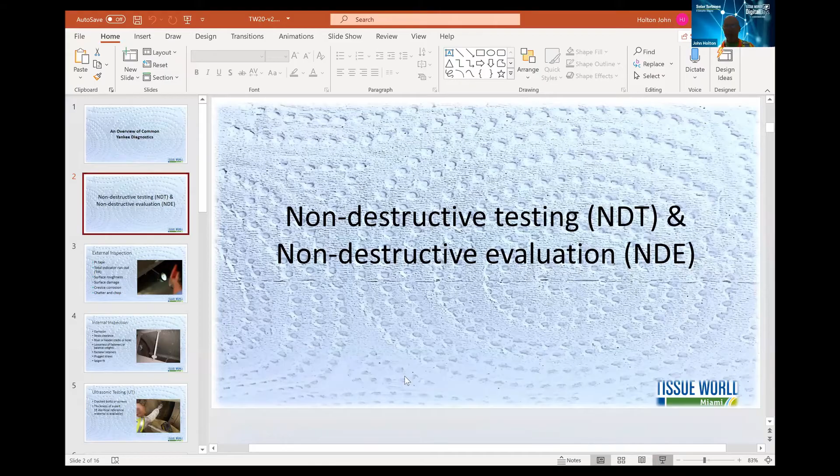Hello, everybody. It seems we lost John. John, are you here? I just got back. Okay, so we continue with the original schedule. Okay, yeah, thanks. Sorry about that. It's technical difficulties here, and well, let's just see if I can share my screen and we'll get going from there. Okay, has everybody got it? Okay, so we have started.

All right, everybody. Today we're going to have 5 sessions, and at the end we're going to have 5 questions and answers of real life problems. And at the very end, we're going to have 8 possible voting opportunities where the audience chooses the one and only option. The boss says you have no money, you can choose one option and you better get it right. And then the audience will vote on which of those 8 options would be the best solution if you only have one chance to solve the problem.

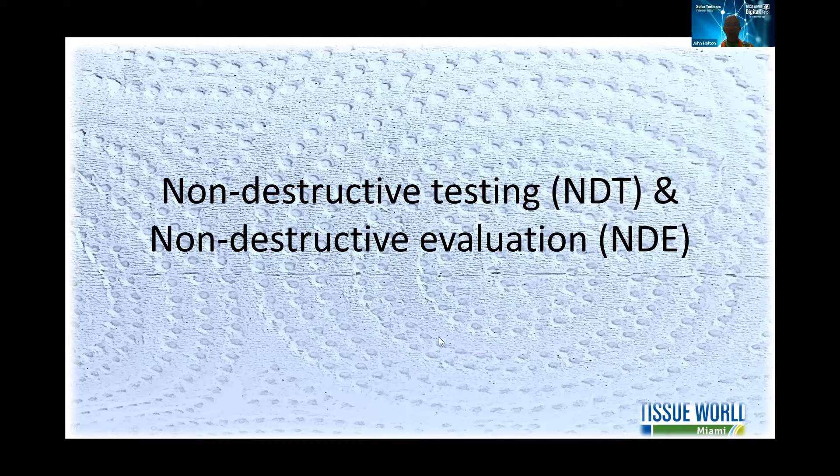So I'm going to quickly go over several typical diagnostics techniques. Those techniques will be coupled in the end in order to give you 8 options, 4 from our speakers, and then 4 from the discussion I'm about to have. So let's get started. I'm going to talk just about common forms of non-destructive testing. So very common inspections that we all do, and you may want to take notes about what they all are, because there's a lot in here.

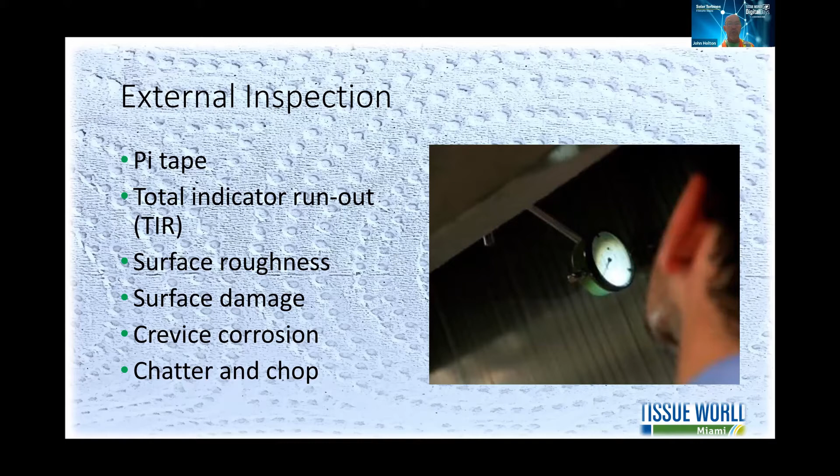The external inspection, that would include pi taping, total indicator runout, or TIR, surface roughnesses, mapping of surface damages, inspections for crevice corrosion, chatter, or chop. The next common inspection is an internal inspection, where you might check for corrosion, straw clearances, riser or header cracks or holes, looseness of fasteners or balance weights, fastener retainers, plugged straws, or spigot fit.

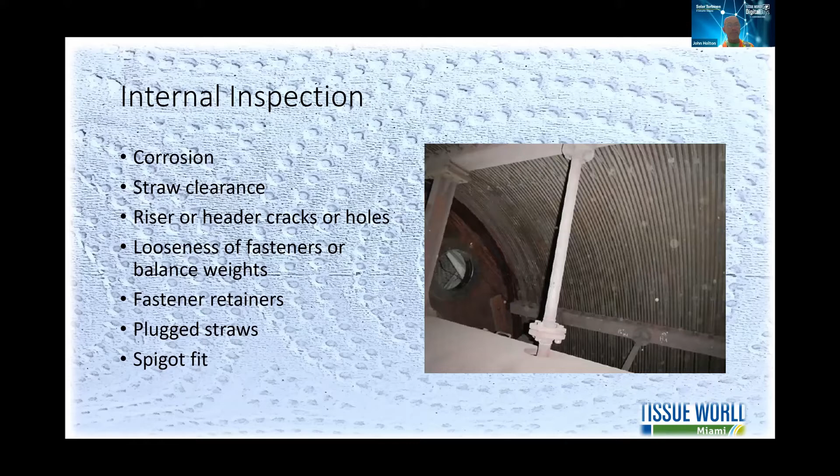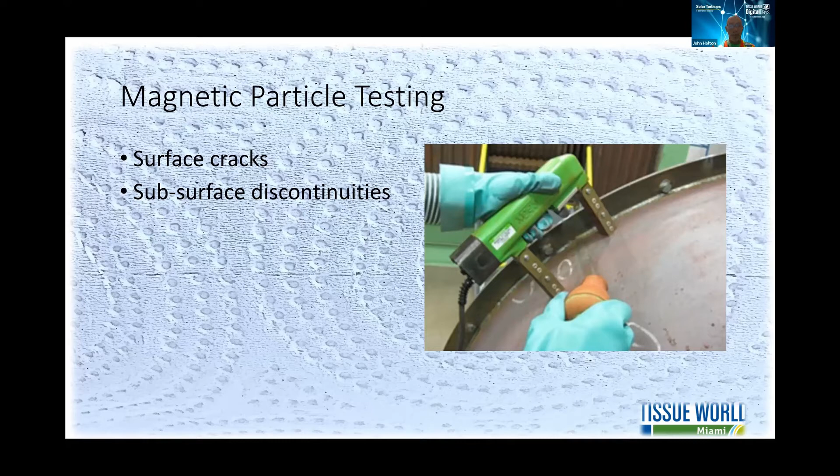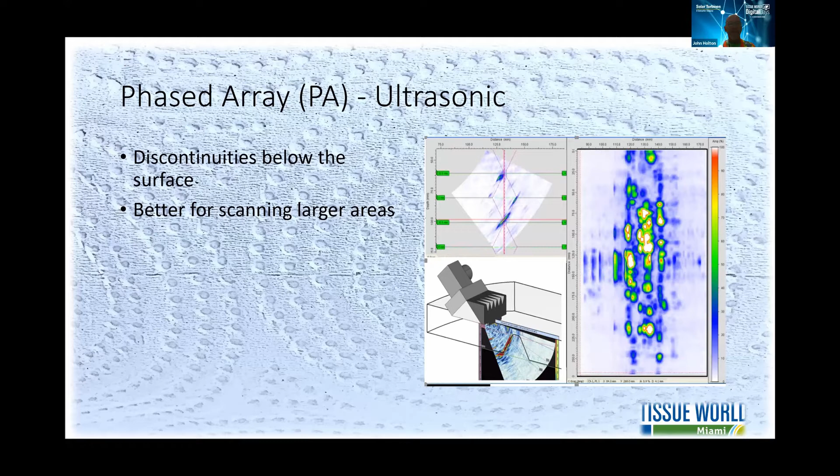Ultrasonic testing, something very common, normally every 5 years, for cracked bolts or screws, thickness of the part, if the identical reference material is available. Magnetic particle testing, where you would look for surface cracks or subsurface discontinuities. For steel Yankee dryers, a common approach would be phased array ultrasonic, which can look for discontinuities below the surface. This technique is better for scanning larger areas. If you had to scan a whole Yankee dryer, for instance, this would be the tool used. And then we have time of flight diffraction. It also checks for discontinuities below the surface, and it's better for determining the size of the discontinuity.

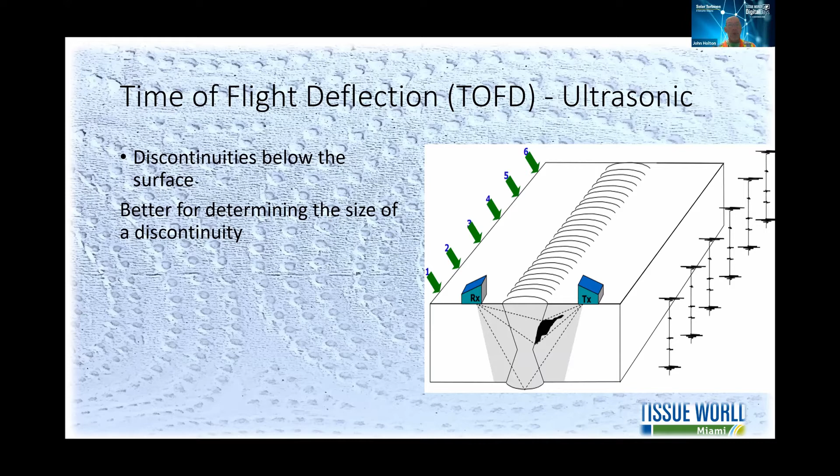Okay, pressure roll load test. This test verifies the nip load, if you're at 90 kilonewtons per meter or not. The curve may say that. This test will prove whether you're at full load. It verifies zero load, how much pressure it takes just to lift the roll. It determines if a load skew exists, and it develops a load curve from accurate and repeatable measurements versus a calculation.

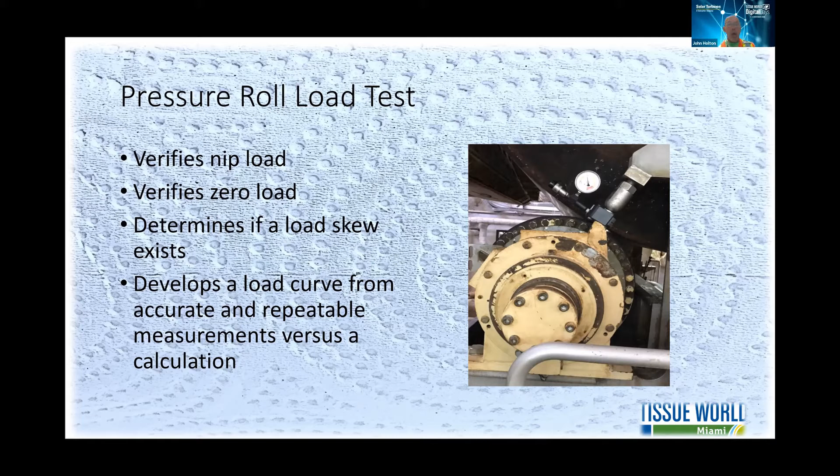Operational profiling is also a way to optimize the differential pressure or blow-through velocity. You can see here in this photo where the headers in this Yankee dryer are clearly visible. This may be an opportunity to optimize the differential pressure or blow-through.

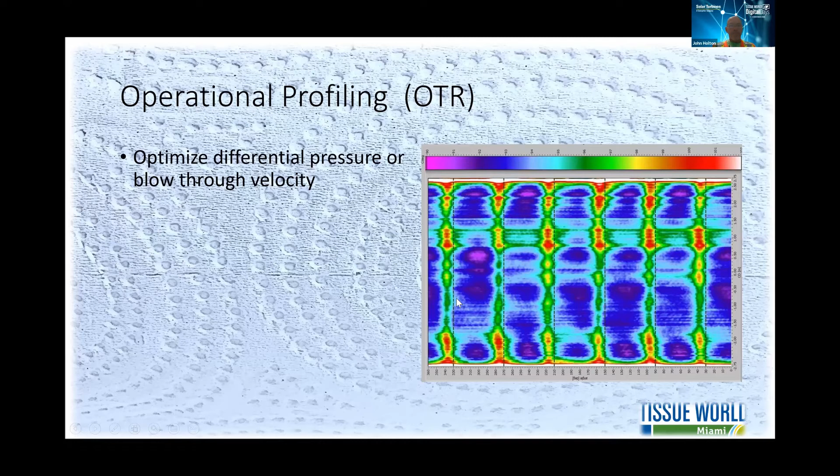Again, this is another operational profile commonly used, and this is for crown optimization by comparing the operating profile to the grinding profile to crown specification. So a good tool for getting the crowns absolutely right. It can also tell you if there's any wear on the surface, because we don't know for sure sometimes if it's operating conditions or wear conditions. So by measuring under grinding conditions, we can separate the two and determine exactly how much wear the Yankee dryer has.

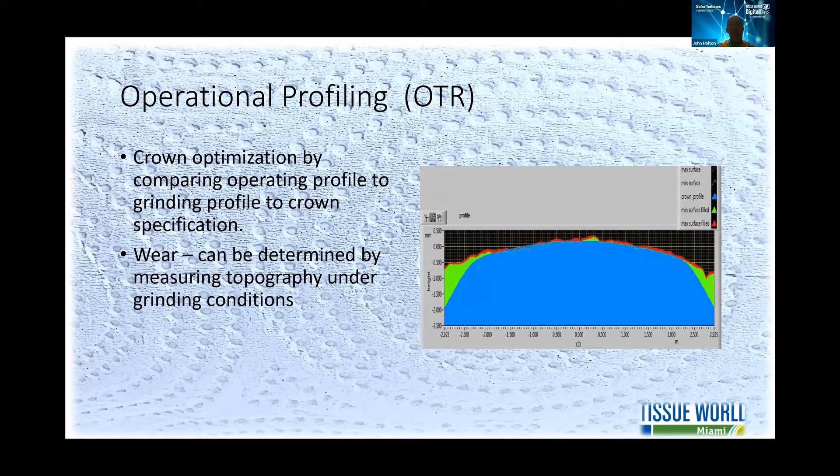And then high-speed infrared imaging or line scanning. This will check for very small variations on the shell surface, such as a through shell leak. And sometimes through shell leaks occur during operation, but you shut it down and you can't find it. This is a tool that would find a through shell leak. It can also, as the OTR, determine if there's internal condensate system problems. Or it can also fool you because it can be a reflection of a poor profile of a sheet coming to the Yankee dryer.

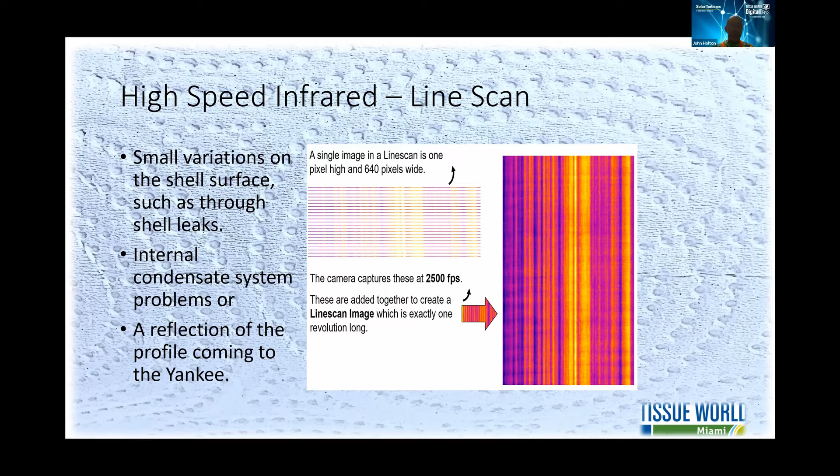Each pixel in the high-speed line scanning can be used to develop an FFT analysis. So you can use the frequencies to determine any influence upstream or internal issues. So it could be a condensate system inside the Yankee. However, if the FFT shows a longer or a lower frequency, it might be the felt. And the line scanning can also pick up seams in felts, for example.

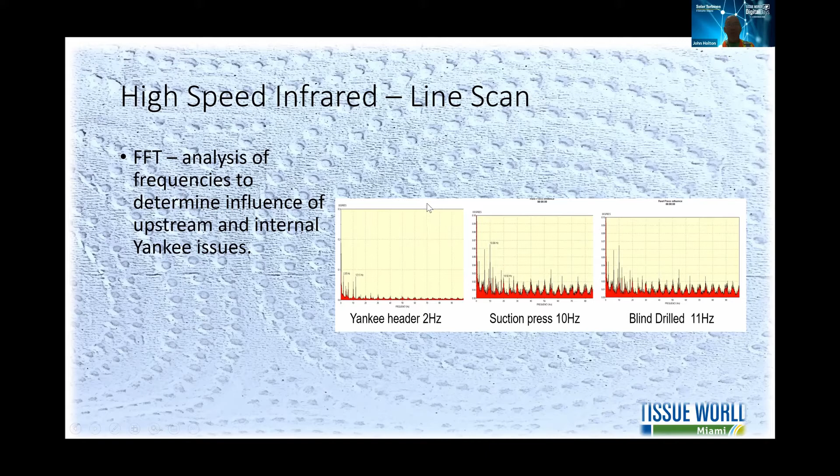In summary, exterior inspections can be on steel or cast iron dryers. The same with interior inspections. UT or MPI, magnetic particle, can be used on both. Phased array and time of flight are typically an application for steel dryers to inspect the welds, etc.

Operational profiling or on-the-run profiling looks for internal issues in the Yankee or upstream issues.

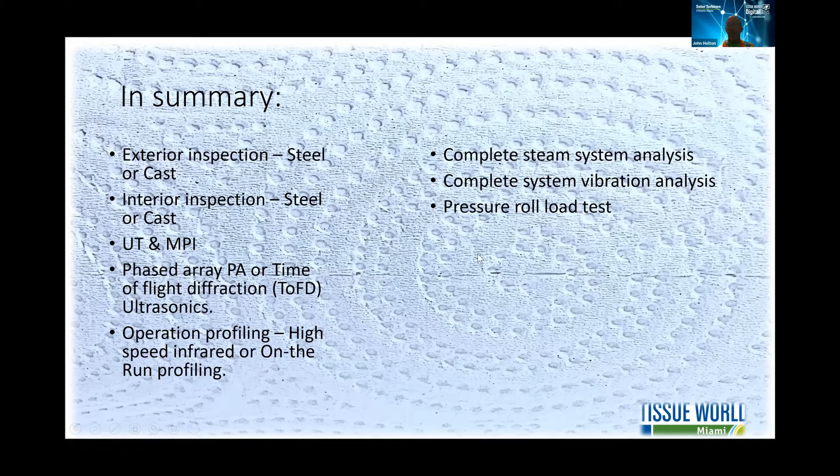And I can't see the rest of mine.

Okay. Pressure roll load test, and then these two will be steam systems, and vibration will be spoken to by later participants. And so that concludes my presentation.

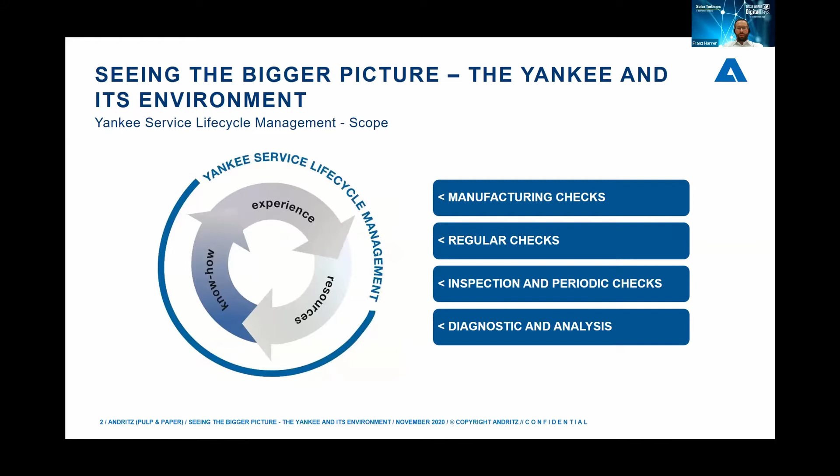It's good. Perfect. Today I'm going to talk about Yankee dryer lifecycle management, the inspections and periodic checks. In my presentation, I'd like to cover manufacturing checks, so all the inspections we're doing during manufacturing, the regular checks, which can be done by the operators themselves, inspections and periodic checks, which are done by service specialists, and diagnostic and analysis methods, but most of them you already covered in your presentation.

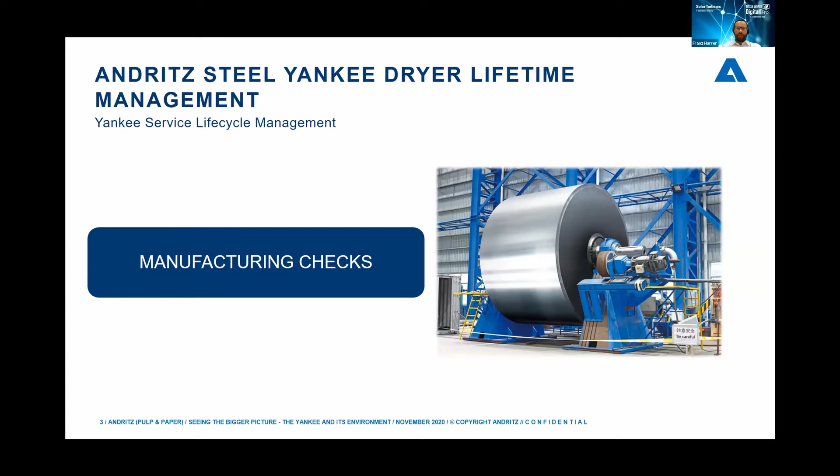The manufacturing of pressure vessels, respectively the Yankee dryer, is constrained to international pressure vessel standards like the AD 2000 or the ASME or GB 150, but all these regulations and acceptance criteria are designed for static pressure vessels, so it's up to the Yankee manufacturer to develop its own more strict acceptance criteria and testing procedures to handle dynamically loaded parts as the Yankees are.

As John already mentioned before, the most common tests for steel Yankees, where the test focus is on the welding seams, are the magnetic particle test, ultrasonic test, time of flight diffraction, and phased array. We really recommend 100% testing of all the welding seams in longitudinal and circumferential direction. And we recommend MT and UT testing before and after the heat treatment to make sure that during the stress annealing process no indications or cracks appear.

The final release and certification of a pressure vessel is always done by an external accredited and authorized authority. They observe the manufacturing process, check all the manufacturing and quality documentation, and perform a final water pressure test or acoustic emission test. The water pressure test is a safe test procedure for checking pressure vessels, as there is no energy stored in water compared to steam or air. Acoustic emission test is a very seldom chosen option for Yankees in manufacturing.

Before the Yankee leaves the manufacturing location, a final quality check will be done, containing a detailed check of the metallizing, visual, and quality parameters. As well, internally, the siphon system, the condensate removal system, will be checked. All tolerances and dimensions will be checked before the Yankee is packed according to specification and shipped to the customer.

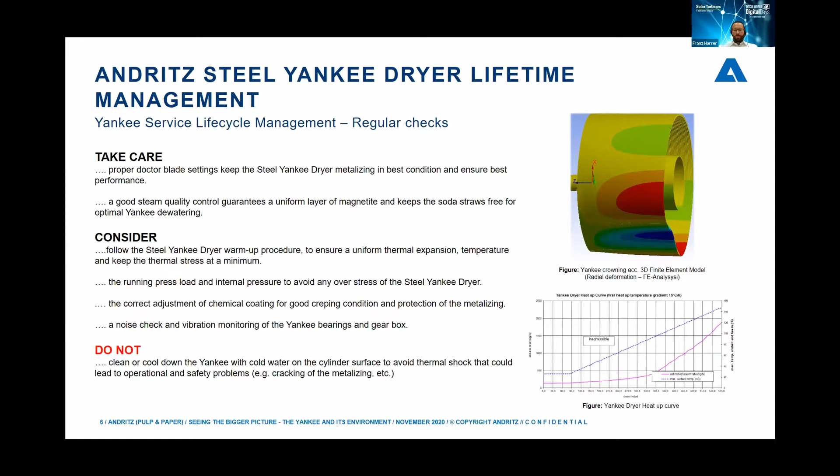Now coming to the inspection and periodic checks, which is recommended by all Yankee suppliers and the TAPPI organization. Here as well, the focus is the inspection of the metallizing: a detailed visual inspection of the Yankee surface, followed by microscopy inspection, roughness measurement, run-out measurement, measurement of the remaining layer thickness, and so on are the main tasks of the inspection of the metallizing.

Inside the Yankee, the soda straw system and the condensate removal system have to be checked in detail, but here take care: only authorized and trained personnel are allowed to enter the Yankee, and all safety measures and procedures have to be taken into consideration. If any soda straws are blocked, we recommend to replace them by spare parts. If no spares are available, you can clean them with a drilling tool and support this as well with chemical acidic baths where you put the soda straws in.

And in general, if you enter the Yankee, check if there are any loose parts around, if there are any cracks or whatever. If you find some loose parts, it has to be investigated where they are coming from. They have to be reinstalled and secured in a way that they never get loose again.

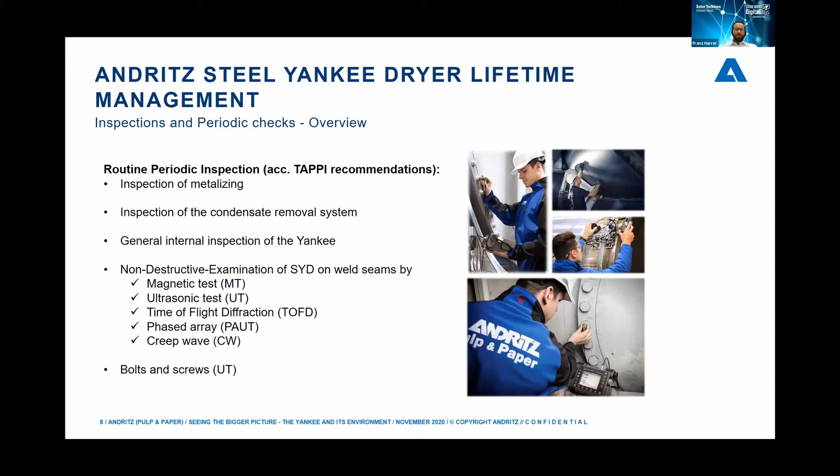As the focus here is on welded steel Yankee dryers, it's strongly recommended, and in some countries it's mandatory, to do non-destructive examinations of the welding seams on a regular basis. Here you can use magnetic test, ultrasonic test, time of flight diffraction, phased array, creeping wave, and so on, just to check if there's any indication since the last inspection. All bolts and screw connections have to be checked on a regular basis, and especially on the big parts like the head-to-shell connection, UT testing can be performed to check if there's any crack in the screw, and then it has to be replaced.

Now at the end of my presentation, I would like to talk about diagnostics and analysis. The on-the-run measurement is state-of-the-art technology for advanced Yankee dryer inspections. There you will get information about the geometry of the Yankee, how it is performing. You get a temperature profile in machine and cross machine direction. This gives you information about dewatering or the performance of the condensate system. And you can as well discover overheating of the edges. Additionally, laser measurement to check the crown and the wear is possible.

Visual checks are the most important things and should be done regularly by the operators themselves. And I really recommend to do audits on a regular basis with the machine suppliers, chemical suppliers, blade suppliers to optimize the conditions around the Yankee, especially in the creping area. This saves the Yankee surface, keeps the metallizing in a good condition, can increase the blade lifetime, and chemicals can be saved as well.

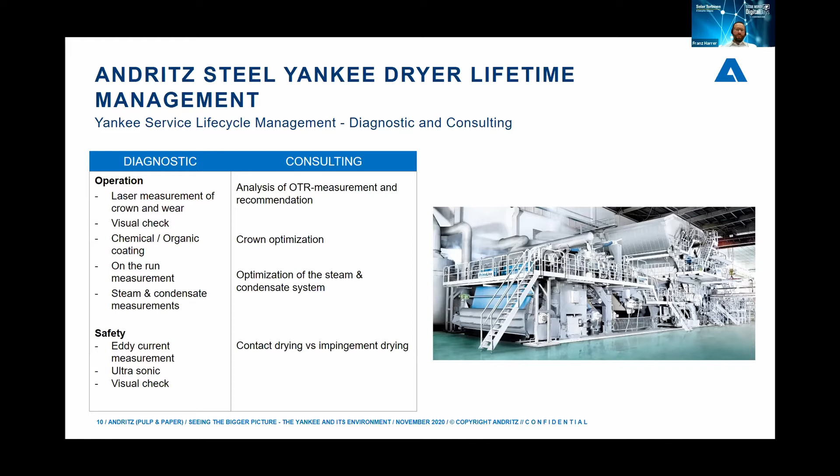Steam and condensate measurement is very important. This has to be done on a regular basis in the laboratory to check if the pH is in the right range, if there is an overload of iron or copper in the steam, which can lead to damages inside the Yankee. Well, so far that's all for my presentation.

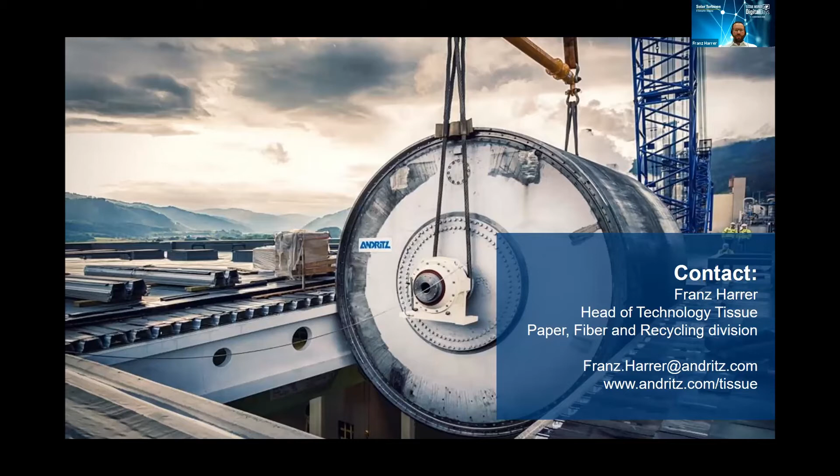Next up, I'd like to introduce Ian Padley. He's the Global Team Solutions Manager at BTG, and he'll talk about crepe blade wear modeling. I'll hand it over to you, Ian.

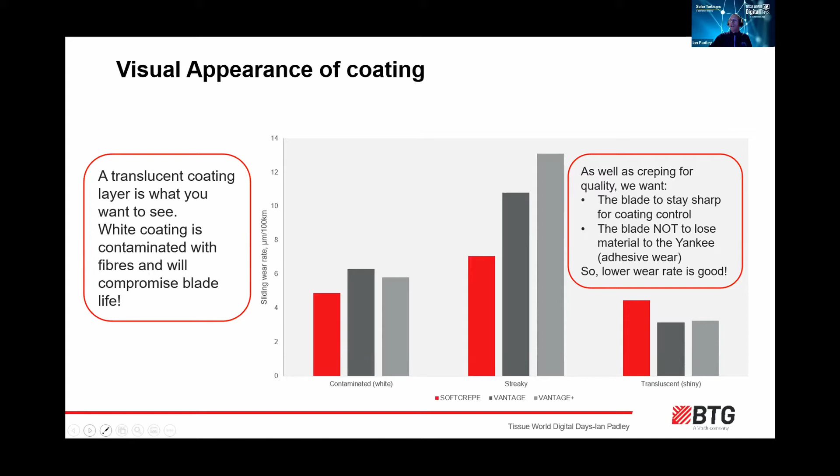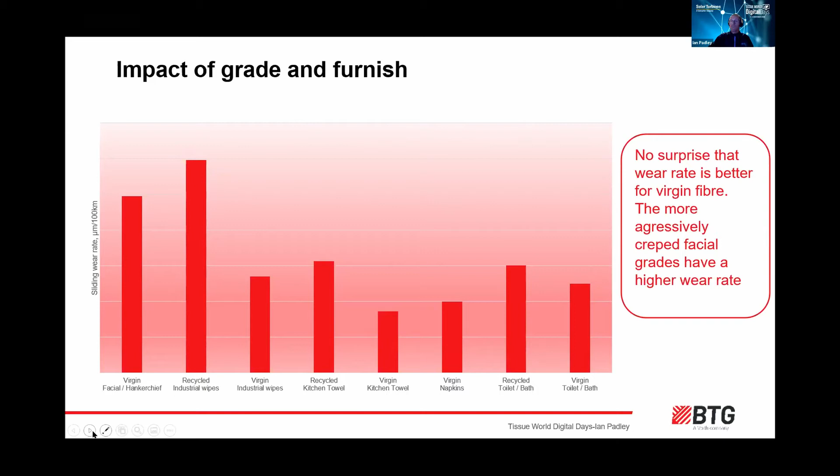Virgin kitchen towel, commonly running on a great big dollop of wet strength resin, which will stick to the Yankee as well, and creping at a higher moisture, fairly low wear. No real surprises there, but it's nice to see some of our thought processes validating the data here. Okay, let's take a look at something else.

What we were able to do in our database, which has got many, many hundreds of blade wear profiles in it, and data collected by the BTG field engineers around the world when they sample these blades for testing back at our headquarters in Switzerland, is we've asked them to say what type of Yankee coating is out there. Now, there's many vendors and many types of Yankee coating. So using our industry knowledge, we categorize these coatings into 3 types.

The fully cross-linked or blended premium type coating. You may hear words like hyper-branched or thermoplastic coatings applied to these. The standard modified polyamide epichlorohydrin, PAE type, and the basic PAE type coatings, which are unmodified wet strength resin.

Again, we've got the 3 blade types, and it's probably more clear on this one, doing a cumulative effect of all the 3 coating types and all the 3 blade types, that the A type, fully cross-linked or premium type coating, all other things being equal, is giving a lower wear rate.

Well, who knew? I mean, I think the chemical suppliers have been telling us this for many years, but we would probably concur with them that in the right circumstances, the premium type coatings are going to repay that investment in terms of blade wear and the good things that come from having a low wearing blade. Again, the blade stays sharp, you're controlling the coating, you're controlling that for good crepe and maximum asset protection.

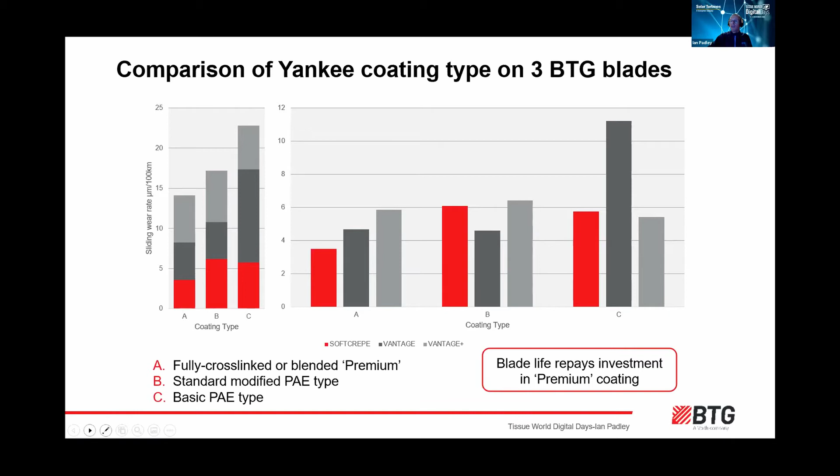So it should be fairly common sense. If we're using a cleaning blade, we should be maintaining a nice translucent, even coating layer, and that's going to be reflected in good wear on the creping blade.

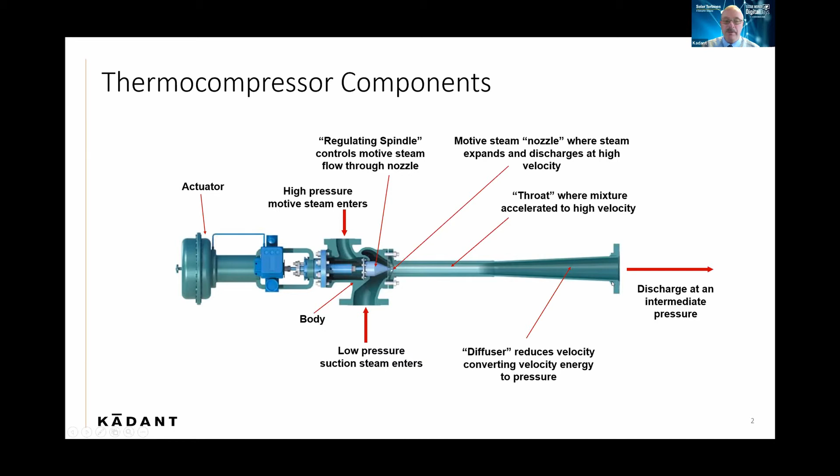To start with, I'd just like to review what is a thermocompressor, just to make sure we're all on the same page. Essentially it's a device that utilizes high pressure steam to compress low pressure steam, mixes it up in the diffuser or in the throat, and discharges it at some intermediate pressure. Before we can start troubleshooting a thermocompressor, we need to identify the operating conditions. What are we expecting from this thing?

And every Yankee is unique. Every Yankee has its own siphoning system. So it's not a matter of fact that you can take, say, a 4-inch thermocompressor from one Yankee and apply it to another. Likely it's not going to work very well.

The first step in determining the operating conditions is the condensing load. And if this is an existing Yankee where you're having an issue with the thermocompressor, doing a rate of rise test is the best tool for determining the actual condensing load. You go measure your rate of rise, how long does it take for the condensate to go up a certain height in that separator tank.

If it's a case where you're replacing a Yankee or increasing the conditions, or it's a new Yankee, we have modeling software that we can run through to determine what that condensing load should be theoretically. From there, we go on to the blow-through calculation. Once we know the siphon parameters and the condensing load, the difference is going to be the blow-through. And the blow-through in a Yankee can be anywhere from 40 to 90%, even close to 100% in some cases. So that blow-through amount can vary substantially.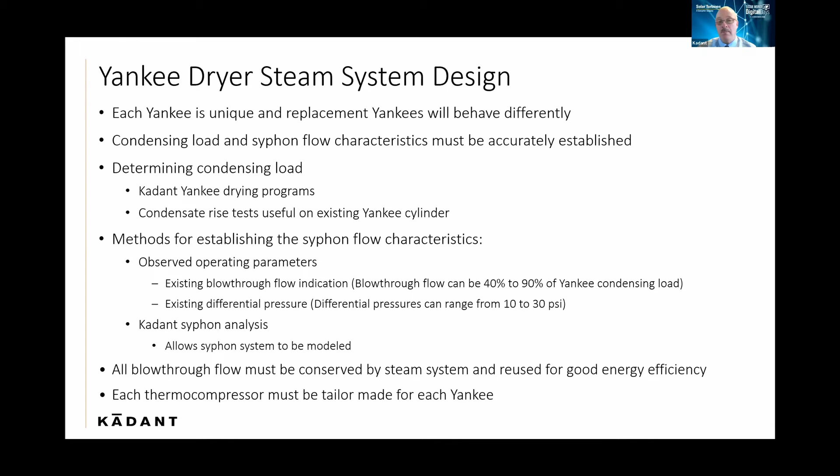And the differential requirement on a Yankee can also vary substantially, anywhere from 10 to 30 psi of differential. So this is where it becomes very important to look at what we're trying to accomplish with the thermal compressor, because the key in making this thermocompressor work properly is that the thermocompressor curve must match the syphon curve.

Once we know the design or operating conditions, there are certain ratios that we must respect. These ratios include some factor of safety, so if you go with these, you'll be on the safe side. The expansion ratio is the ratio between the motive pressure and the suction pressure, and we like that to be at least 1.4, in absolute terms. The compression ratio is the discharge pressure over the suction pressure, and we like that to be less than 1.9.

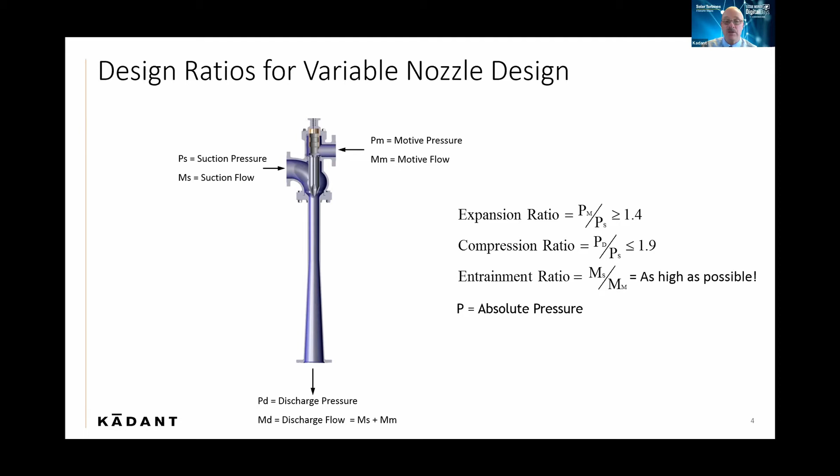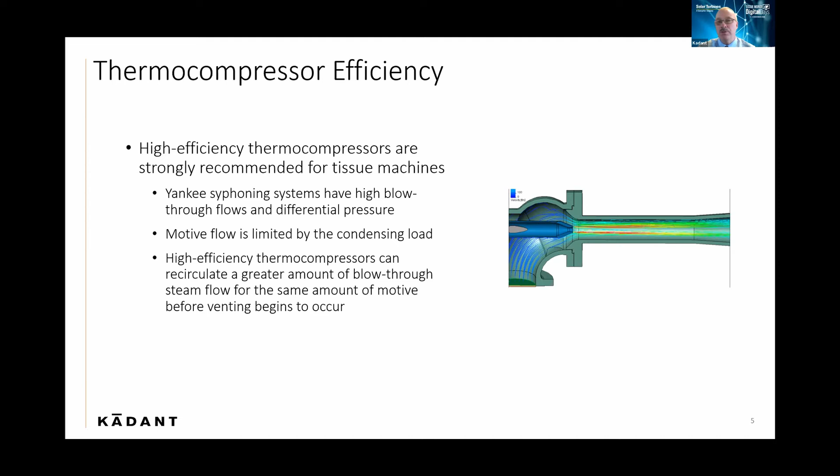The entrainment ratio is the amount of suction flow over the motive flow, and we like that to be as high as possible, especially on Yankees. That's the reason we recommend what we call high efficiency thermocompressors, because on a Yankee your motive flow is limited by the amount of your condensing load. That's why it's important to do that rate of rise test. If the motive flow exceeds the condensing load, we will never be able to close loop the blow-through, and it's going to result in some venting.

What do we mean by high efficiency thermal compressor? All these units are in imperial units since we're doing this in Miami. If we look at the suction flow, where we have 4,000 pounds per hour of flow, a conventional thermal compressor would require about 2,800 pounds per hour motive to recompress that 4,000 pounds per hour of suction. A high efficiency thermal compressor would do the same amount of work but utilize only about 2,000 pounds per hour, substantial savings in motive. That's why it's so important on thermal compressors for Yankee applications where we're limited by the amount of motive flow we can utilize.

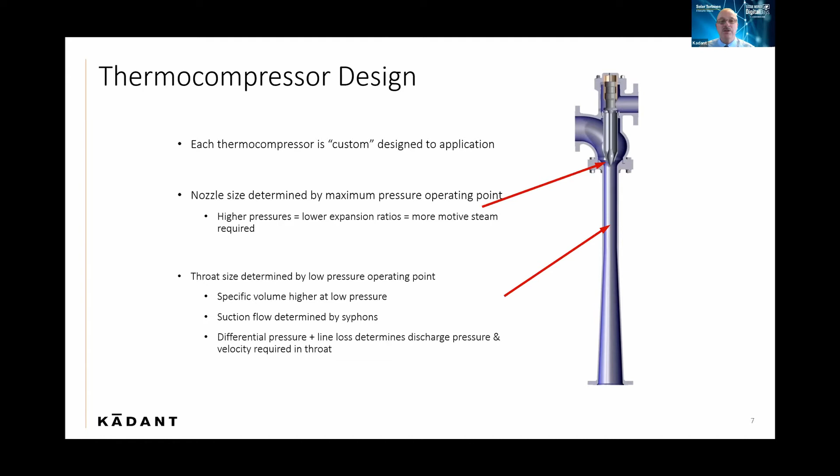The thermal compressor itself: it's the high pressure condition that determines the size of the nozzle, because that's where we need the most amount of high pressure steam. But it's the low pressure condition that determines the size of the throat in the diffuser, because the low pressure condition has the highest specific volume. So what we like to do for Yankees is try to narrow that gap as close as possible, bringing your low pressure condition to be almost the same as your high pressure condition.

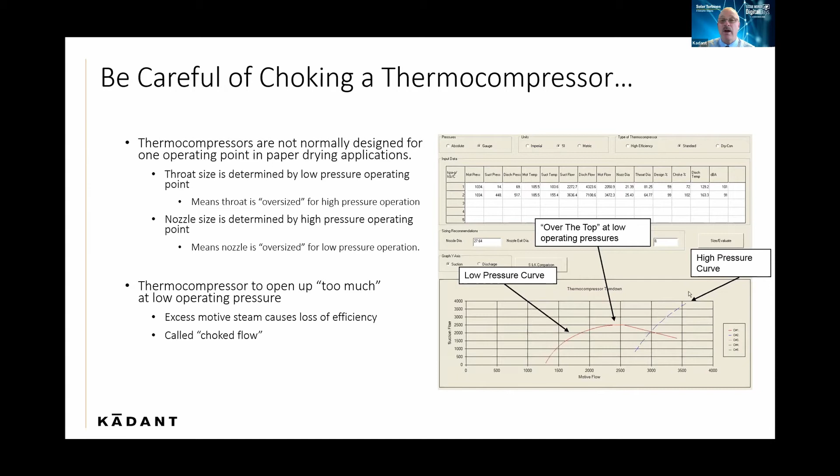One thing we have to be careful with is choking thermocompressors. If that range is too wide between your low pressure and high pressure range, it's possible for the thermal compressor to get into a choke condition during a low pressure condition. If you look at the vertical axis as suction flow and the horizontal axis as your spindle position or motive flow, we get up to a certain point, about 2,500 pounds per hour of suction, and then if we continue increasing the motive flow, we start decreasing the suction flow, going in the opposite direction. So we have to be aware if there's a choking condition on a thermal compressor, that we're not operating it beyond the choke point.

So in summary, thermal compressor issues can be categorized in three areas. One is improper sizing, which we see quite often. If a thermal compressor is not working well, it may not have been sized correctly in the first place, or the operating conditions have changed over time. We've even seen cases where a Yankee was replaced and the steam system was completely ignored. Imagine that—but it happens, we see this quite often.

When you change that Yankee, chances are the siphon is going to be a new siphon that comes with it, and it really needs to be studied to make sure the thermal compressor matches that siphon curve. We often see where the motive flow exceeds the condensing load. It seems simple, but it's something we come across in the field regularly, and that leads to the vent valve having to open to maintain the differential.

The other issue is more mechanical or erosion related. The erosion could be from the body, where high pressure leaks into the low pressure section, through erosion of the spindle or erosion of the nozzle itself. Over time, this means the thermal compressor position closes to maintain the same blow-through, the same differential across the Yankee.

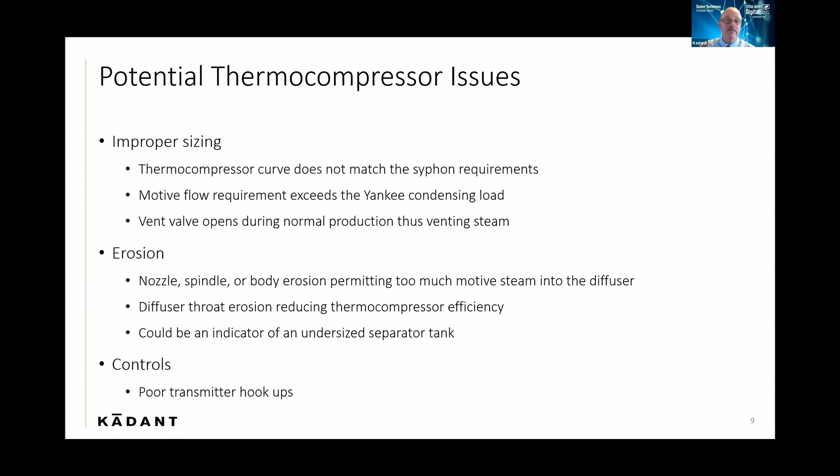That's all I have, John. Thank you.

Thank you, Michael, very interesting. You make a couple of good points. I was at a mill a couple of years ago — they had replaced 10 cast iron dryers with 10 steel dryers, all vents open, and they'd been blowing steam out of all 10 machines for years and simply didn't understand why. Yeah, we do see that. All right, thanks very much. You're welcome.

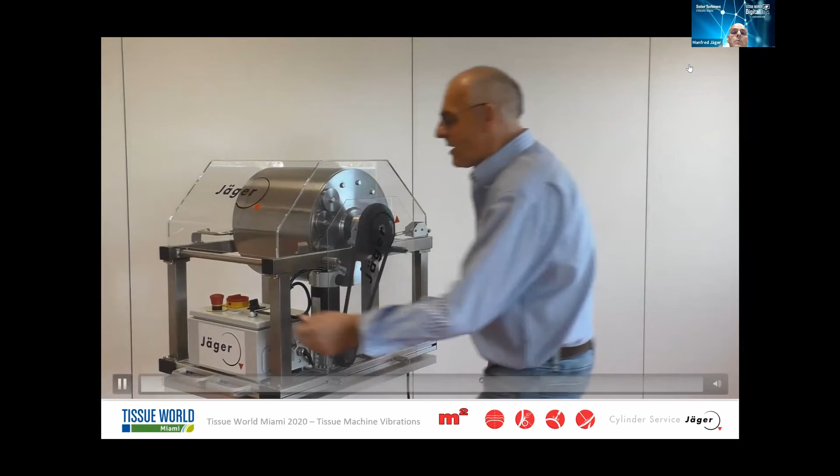Tissue machine vibrations — is the Yankee well balanced? That's the question we'll show. We have a nice sample to demonstrate this problem. So we start the machine and run it to see what happens. What we see is strong vibration, the whole frame and everything — that's not very nice. So we'll stop the machine and see what happened.

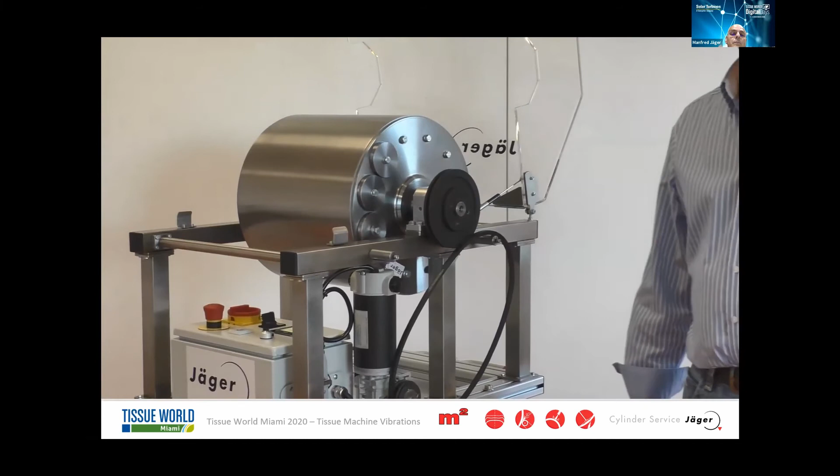So now we disconnected the drive to see how the dryer is going. If we stop the dryer, is there some movement or something else? So now we see it, the dryer stops and reverses. So what's happened here?

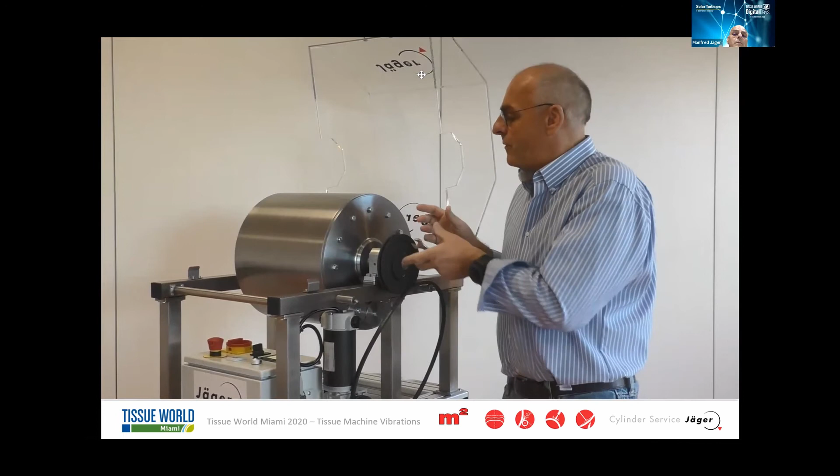We have a turning axis here from front side to drive side, and we have a mass center on drive side and also on front side. And this mass center is not in the center. If this mass center is not in the center of the turning axis, then we get a torque, and this torque is turning the dryer.

If this mass center is going slowly to the bottom like this, and if it is on the bottom, exactly below the turning axis and the mass center, then the roll is stopping like now. So that means we must reduce, for example, the mass on the bottom, on this mass center here.

Then we get this dryer static balanced. So now we can see it that the mass goes slowly down in speed and stops and doesn't reverse anymore. That we can do everywhere, meaning 360 degrees around it.

So that means now we have exactly static balanced this roll. Now we will see it, how is the roll running dynamically, in dynamic conditions.

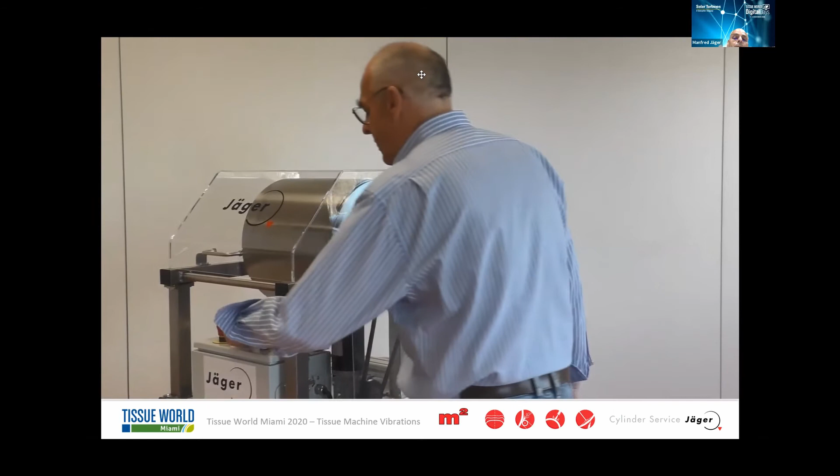We'll think about it. Now we have again this turning axis, and we have a mass center on front side and drive side. Now this mass center is together on front side and drive side together. If we make from these two planes one plane, that is static balanced. But we have here two planes.

That means on this plane and the other plane we have a separate mass, and this is now operating here on this side and on the other side. That means we get a movement like this, which is what we saw before.

That means on this roll we know already how the roll must be balanced. So we make here balancing weights, the right one here on the drive side, and also on front side we install the right weights.

And now we will also check it again, the static balancing, and we can see it. The roll stops also everywhere. So that means the roll is now static balanced.

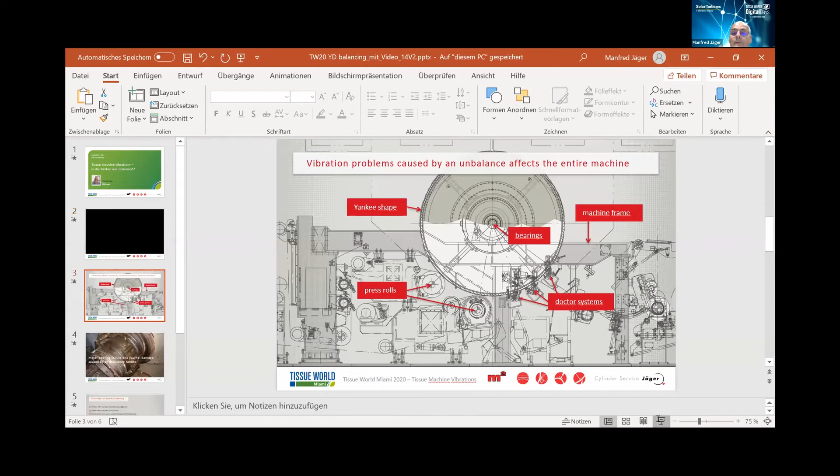Hello together. So now we are back to the presentation, and we have here a tissue machine, a normal tissue machine.

This before was a model of them, so that we can better understand on the model than on a presentation to show only the theoretical one. And I think it was very interesting to see how the machine was moving.

And it's clear we do balancing, for example, the press rolls, every part, felt rolls and so on, we balance. So we have a Yankee, they have a weight of 50 to 150 tons, and we have rolls from a few hundred kilo to 5-8 tons.

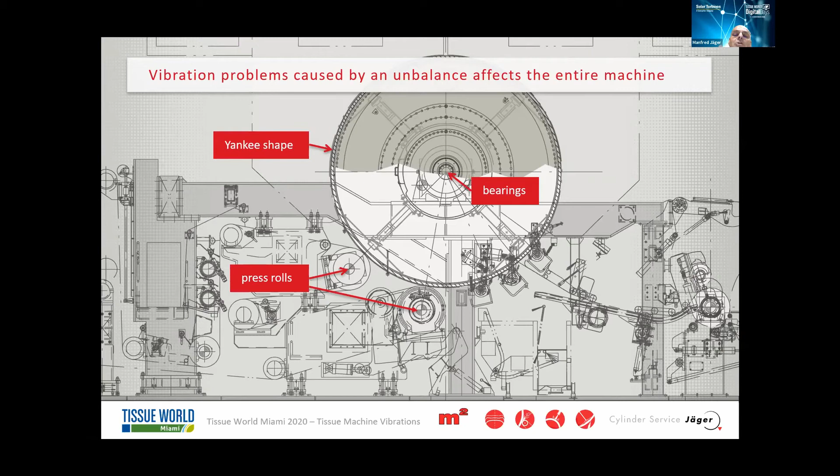That means these rolls are perhaps 5 to 10% of the weight of a Yankee. That means if we bring an influence of 50 to 150 tons movement on the frame of the Yankee, like what we saw before, then it makes not so much sense to only look at the small rolls. That means the small roll starts then also to vibrate, or the doctor starts to show chatter marks or movements like this. And at the end, also the bearings are damaged, that we can see here.

We have one sample of our customer. They were doing, each 2 years, a bearing change after vibration checks. And now, after the balancing, they're running now also 10 years without any bearing changes. So we can see it has a big influence.

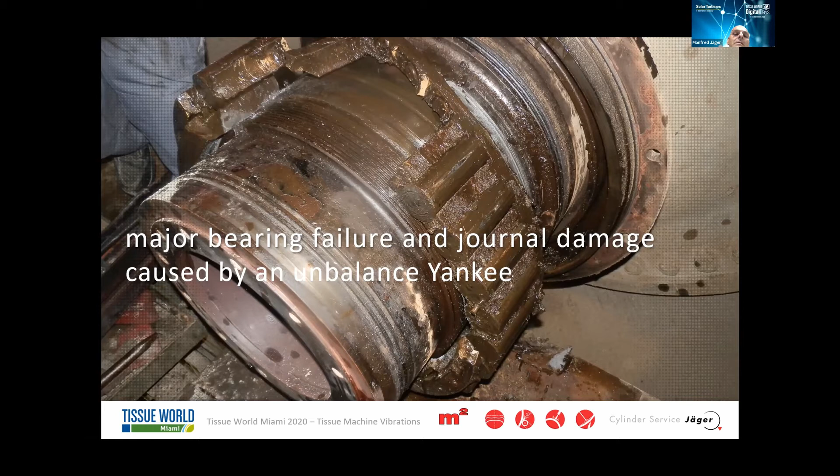And that's our question about this presentation: what is the benefit if we balance the Yankee? Now we can see also the advantage of the balancing. So the lifetime we expected goes up to 20 years.

Also the Yankee, if we stop it, it's a safe stopping. That means the Yankee is not anymore moving or something, so if you do some work on the doctor, it's not risky that the Yankee, once stopped, restarts and goes backwards or something while you have your fingers between. Also the lifetime of the covers and so on is improving, because there are no bearing issues or vibration problems as strong as before.

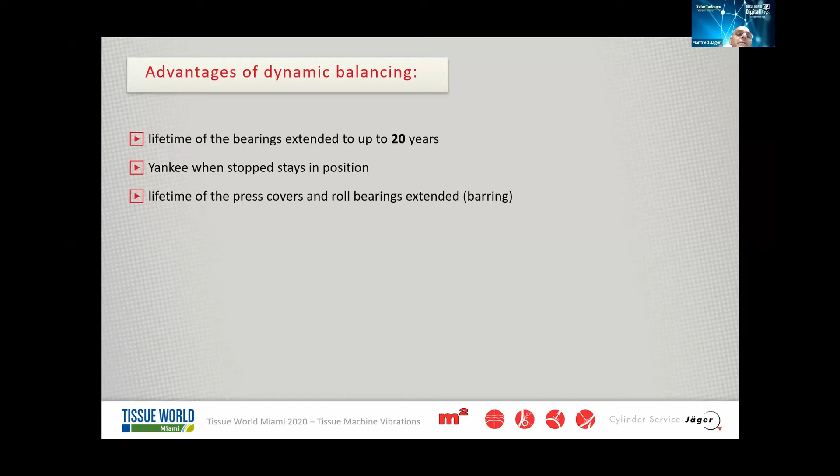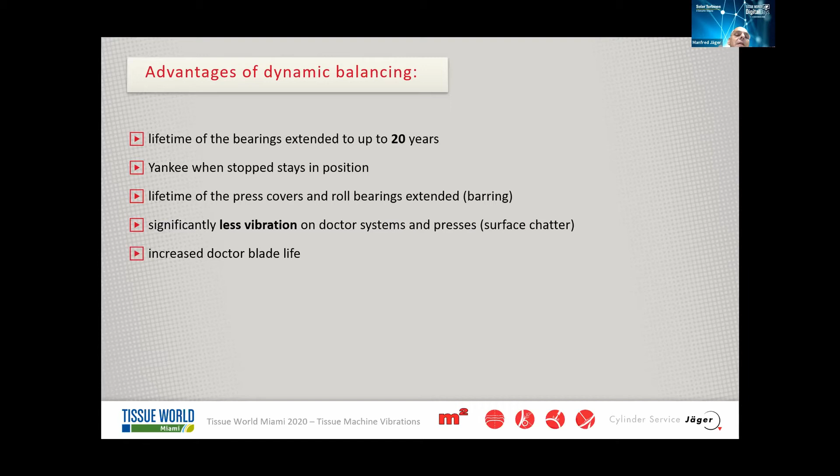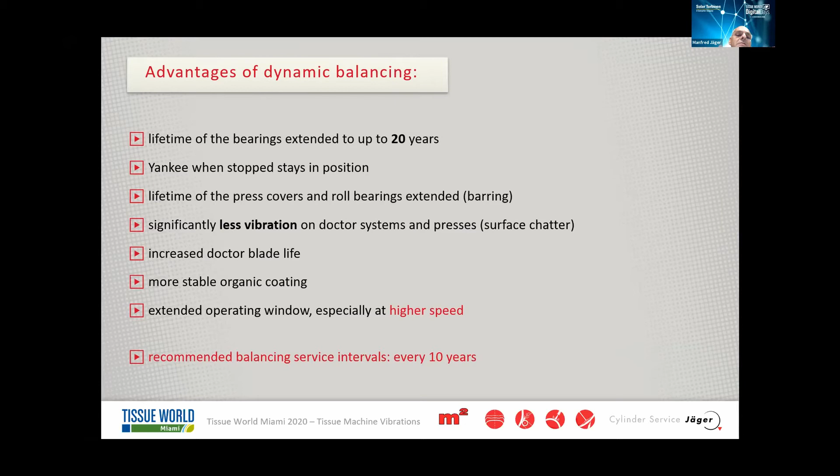Also, of course, on the doctors there is less movement, and that means the doctor blade is always more stable to the Yankee, which means less risk for chatter marks. This also increases the lifetime of the doctors and gives more stable organic coatings. At the end, the operating window is also bigger than before, especially at higher speed. We recommend a balancing service every 10 years to be sure that the Yankee is correctly balanced.

And of the 8 solutions we have, none of them might be the right answer. But for today, we're going to assume that you have to get this work done quickly. You've got the budget for only one diagnostic technique, and you have to choose the best diagnostic technique from the 8 presented to you. After each question, the votes will come in, and we'll talk about what the top votes, or the top 2 votes, are.

And then we're going to quickly go around the panel to Franz, Ian, Michael, and Manfred. If they have any further comments, or if they really disagree, for example, with the audience's #1 selection, then they can elaborate on which one of the 8 they would have chosen and why.

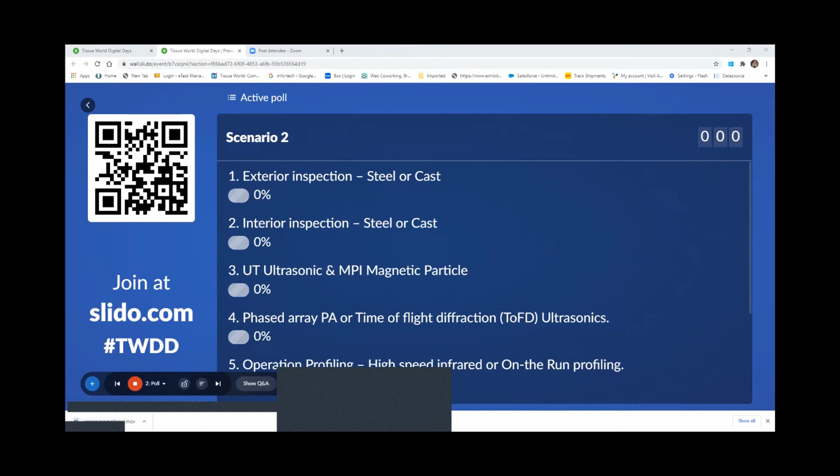Gotcha. One minute time limit, and then the voting is over, and we'll talk so that we can move through as many as possible. Well, we've done over 60 seconds on this. Thanks for the timely reminder there as well. Let's jump into scenario 2, please, if we may. The voting has closed on scenario 1. Let's go into scenario 2. And Michael, let's do 60 seconds after you've read the question. Thank you. I'm just waiting to see the question up on screen before we reveal the results. That's coming up for us now from Central Control.

Oh, it's one of those multiple choice things where you have to guess the question, I guess. Here we go. Just waiting for the question to be shown up for us.

Q&A is open. Right, scenario 2, there we are. They've got 60 seconds to vote on this once I've read the question. Here you go. A dust fire breaks out on top of the hood. And as the cinders begin to fall, the fire quickly spreads. The hoods have to be shut down immediately, and the Yankee is left running. The fire department alarm gets yanked. The fire grows and runs down the cable trays to the point where the paper makers can no longer control it.

It takes 8 minutes before the fire department arrives and clears the building. The last operator out of the control room hits the e-stop. And the next morning, when it comes to assess the damage, the machine will be down for a month to rewire it entirely. The boss wants to know if the cast iron Yankee is safe to start up.

There are your 8 answers on the screen for you. I'll run through them briefly. You have 60 seconds from now. Do you go for exterior inspection? Do you go for an interior inspection, an ultrasonic and MPI magnetic particle? Number 4, you might be looking for a phased array PA or time of flight diffraction ultrasonic.

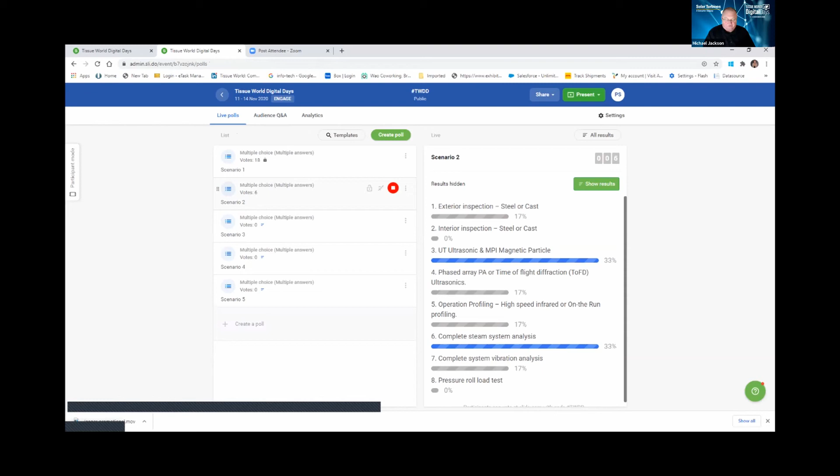Number 5, is it operational profiling? Number 6, complete steam analysis. Number 7, complete system vibration analysis, or indeed the last option that's there for you as well, number 8. Let's now have a look at the polls on there.

And I need to bring up question 3 as voting closes now in 10 seconds or so on question 2. Agnes, would you be able to bring up the question 3 for me, please? Here we go. Scenario 3 coming up.

So we see the sheet blistering a few times a day, sometimes on the front, sometimes on the back. And obviously that's caused significant efficiency loss. The boss wants it remedied, and slowing down to the former speed is no option. Number 1 to 8 in terms of your answers. You've got 60 seconds to answer these, please.

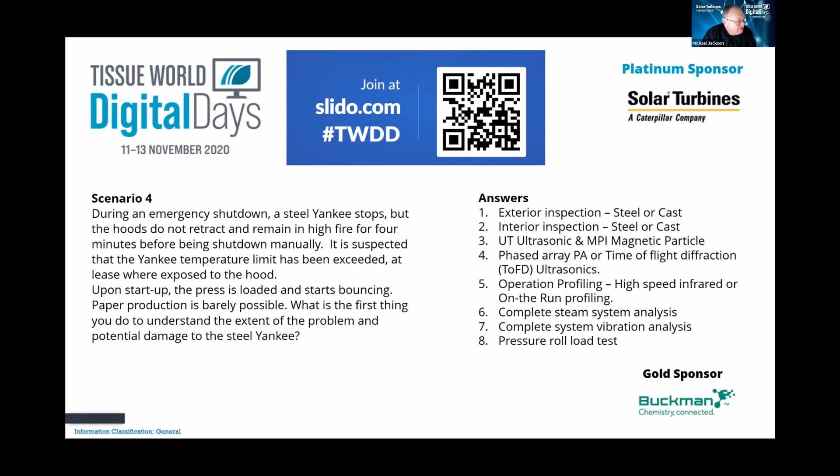Love these scenarios. Whoever planned these really put them together well.

Okay, scenario 1, and we've lost scenario 1. I thought I saw it for a moment. Okay, let me just ask Agnes to put the question back up for scenario 1 and then chop away to the answers. In each case that would help you. Yeah, if we could just flash to scenario 1 and then we'll go through the answers. Okay, there we go.

Number 6 was the most popular. The cast iron dryer started experiencing out of round conditions, which continued to get worse over time. So that's the summary of that. It's been in operation for 20 years and now the problem starts. So let's go back to the answers.

Won't take a second just for us to bring those up. It looked like number 6 was one of the most predominant answers there while we're looking at them, John. Let's see how those answers come up. You may, John, as well be able to go to the app itself on Slido. I'm looking at the answers coming through very strongly, 56%. Oh, got it. Okay. There you go.

Scenario number 1, we had 56% of the audience which said complete steam system analysis and 44% operational profiling. And personally, those were the top 2 on my list. I have no arguments with any of that. Let's go around the table in the order of presentations. Franz, Ian, Mike, and then Manfred. Franz, any comment?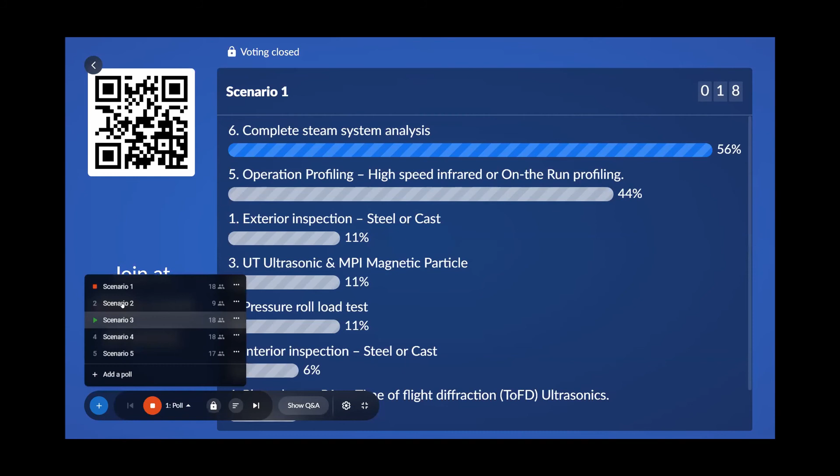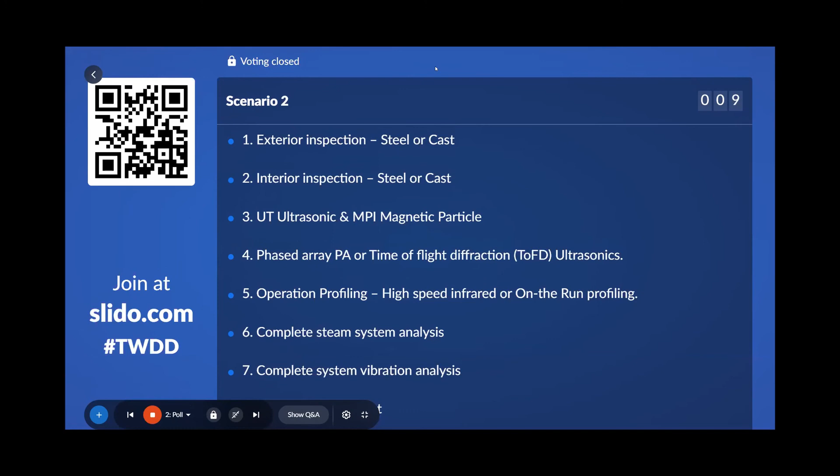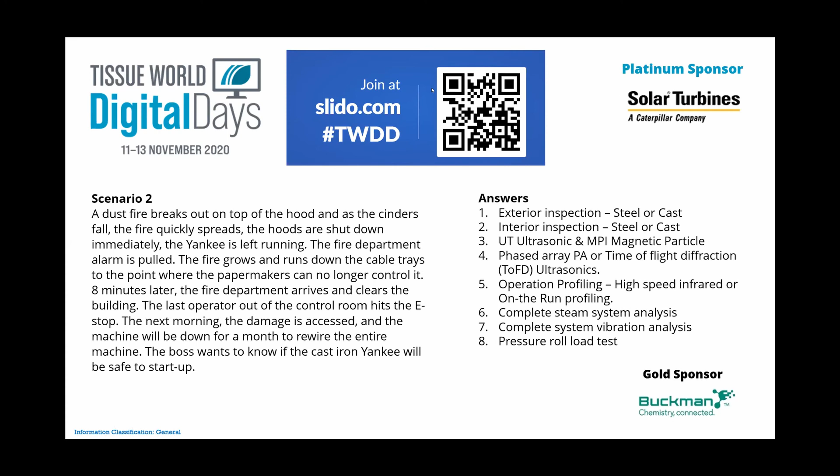Let's go to scenario 2. Thanks, Agnes. If you'll bring up scenario 2 for the question for us to show it there. No. John, are you seeing scenario 2 on the screen? I am still seeing scenario 1. Myself as well. Sorry, Agnes. I know you sent me a message saying it's showing on the screen. I think you may have to share screen to bring it up. Maybe you could just move on to scenario 2 for us, please.

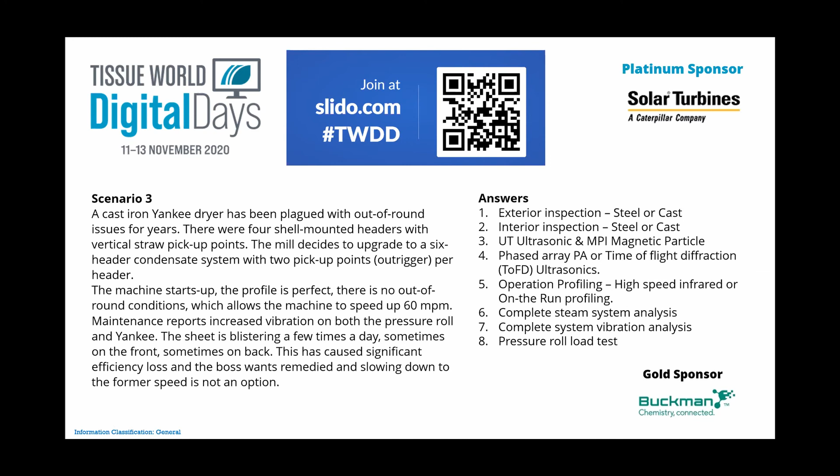I see Jeff Peters has put a note up saying it's on his screen. John, I still don't see it on mine. Do you see it on yours? I do not. Jeff, if you can, I'm struggling to see that. My apologies. It's blinking. I don't see it. Jeff, are you seeing it on Zoom or are you seeing it on Slido? Apparently some of our delegates are now seeing scenario 3. Not me, however. I don't see it at all.

Probably, John, you can read scenario 2 while we're waiting. Yes, yes. Okay, scenario 2. And then if we can bring up the Slido, this is all we need. This is where the dust fire breaks out on top of the hood, and everybody leaves the building. Nobody knows what the fire department did. They don't know how much water was sprayed around. But this was a massive fire. So we want to know, a month from now, is the Yankee safe to start up? If we could bring up the results for scenario 2, then we can go around and have the discussion.

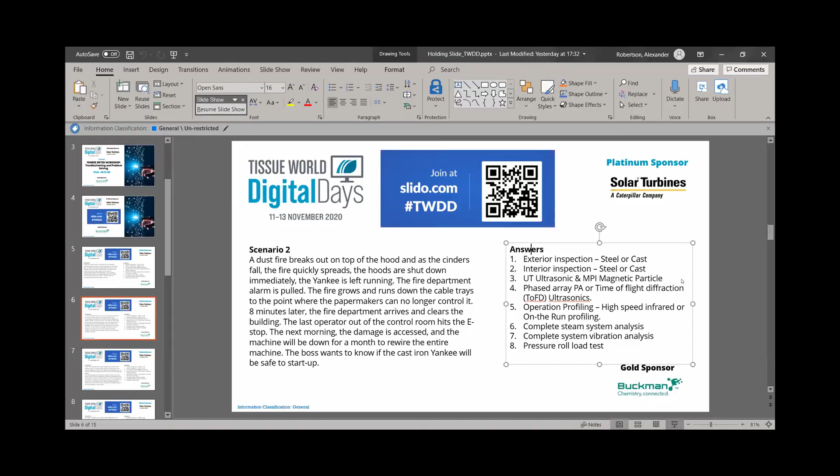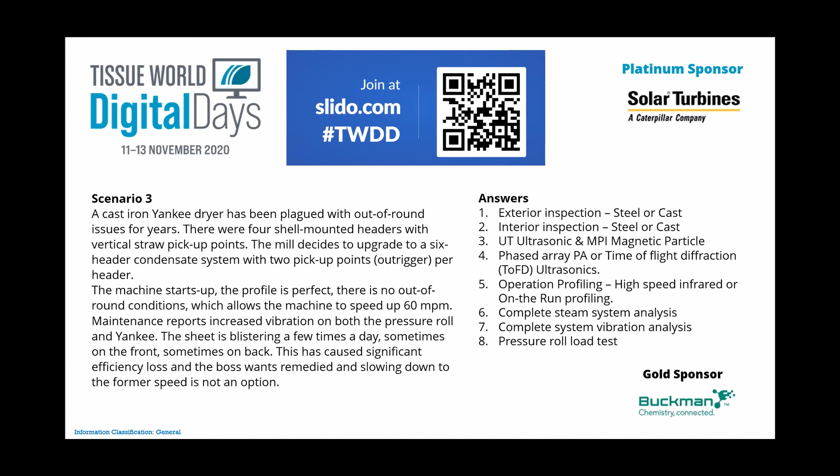Scenario 3 coming up now. There we go. Okay, this is the one where the Yankee dryer has been plagued with out-of-round issues for years. There were 4 shell-mounted headers with vertical pickup points, and the mill decides to upgrade to 6 headers, 2 pickup points per header, so 12 pickup points. The goal was to make it stop going out of round. Machine starts up, profile's perfect. However, there's increased vibration throughout the machine. The sheet is blistering a few times a day, sometimes on front, sometimes on back. It's random, and the efficiency has dropped. So let's see what the audience said they would do first in this scenario.

Operational profiling and complete system vibration analysis. Both great answers. I couldn't make an argument with either one. So let's go to Franz. Any further comments? Additionally, I would do an inspection of the complete steam system to evaluate the blow-through steam and the temperature distribution on the surface. This can be done as well by an OTR, as was answer number 5. But additionally, I really recommend checking the complete system and doing a calculation as well.

Very good points. We don't know if the flow characteristics of the new system match the old system, so that may be part of the problem. Operational profiling might give us some ideas there as well.

Ian, further comments? I completely agree with Franz there. What I'd be doing on the diagnostic, as well as checking all the steam flows, is using a high-speed infrared. This gets to the bottom of it, since it's a thermal issue. So you do it with the steam and the high-speed infrared, and you'll nail it pretty quick doing it that way.

Very, very good point. If you combine the infrared along with the OTR profiling, that gives you a good idea of the origin of the problem.

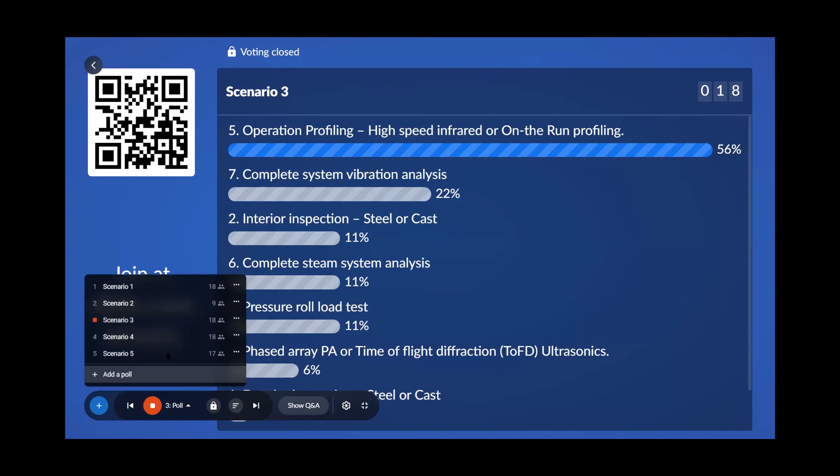Let's take a look up at those answers if it's possible. There we go. Okay, wow, okay.

Excellent, thank you. Ian, comments? Yeah, in this situation, the first question to ask is: is it safe? So the methods outlined, but particularly the non-destructive testing, take you in that direction.

Okay, thank you. Mike, any further comments? No.

Okay, and Manfred? I totally agree, but I would do additional checks. If the hood is burning to the dryer, the dryer has a very thin wall thickness, and the heads are very thick, so the shell itself is growing outside. That means about 100 to 150 millimeters from the edge there is a bending area of the steel. So if steel Yankees are sprayed, the spraying material may get small cracks there, and this area should also be checked for small cracks or the bonding losing or something like this.

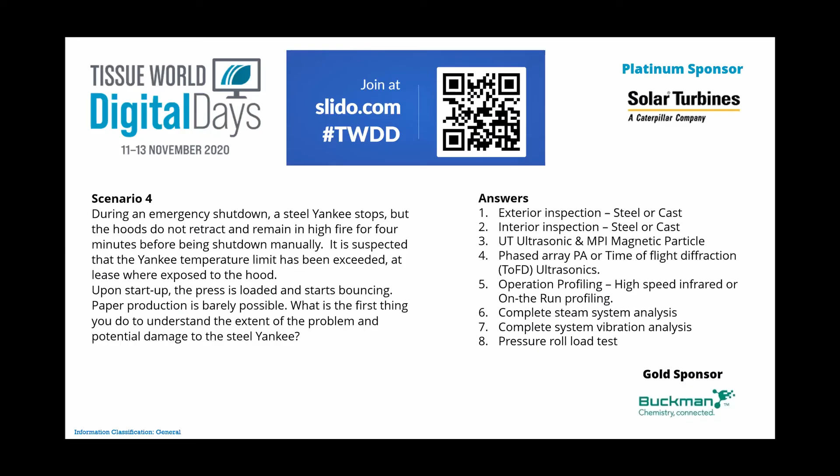Very good, very good. Let's move on to scenario 5.

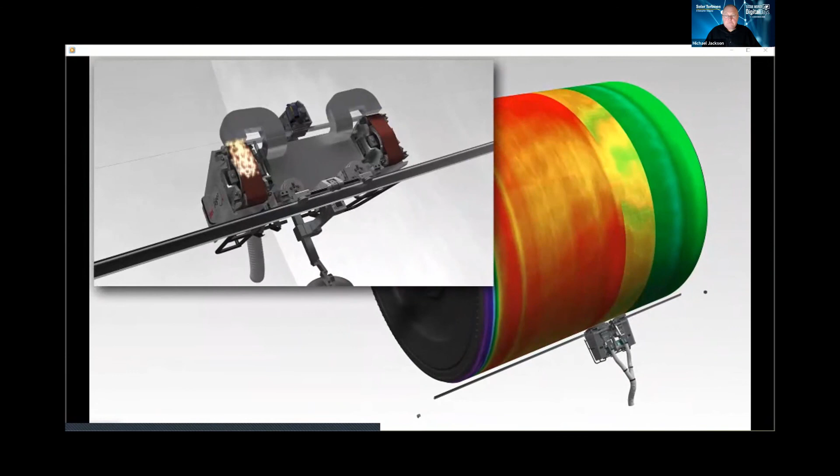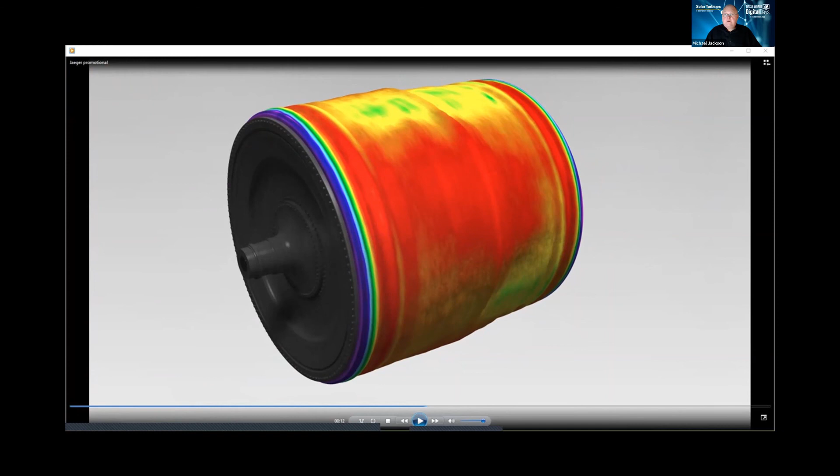Thank you so much for filling us in on that, I really appreciate it. Sometimes the technology gods align, and sometimes they give you one or two headaches. To all of you who stayed with us right the way through from the beginning of this broadcast, again, our abject apologies. We ran one this morning in Asia that worked superbly well - maybe we were all a little overwhelmed with what was going on in the internal dynamics of the Yankee dryers.